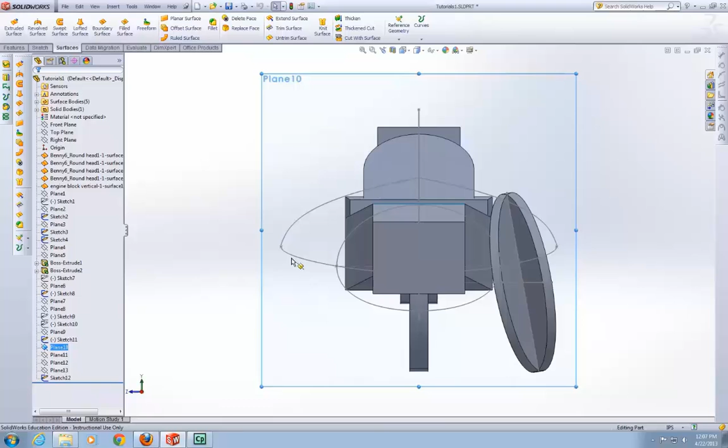Now, we've already completed the first set of guide curves on the front, and we'll now go to our next plane, which is intersecting the front wheel. Now, it's the same process pretty much the whole way. I'd like to create a guideline that intersects both the vertical splines and the horizontal splines. That way I can see the general distance and it's easier to connect my guide curves to them.

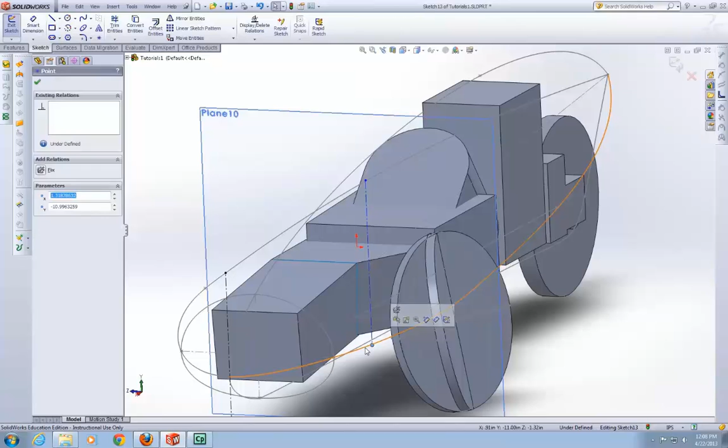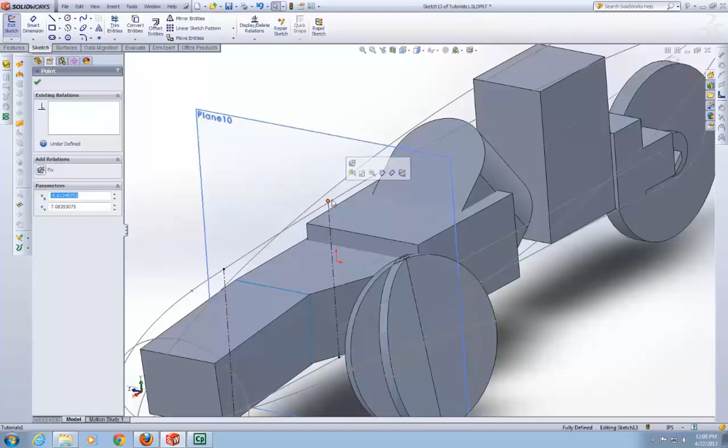Now it's just a matter of kind of fidgeting with the references of this line and making sure they're pierced to both the bottom one and the top. And I missed. I accidentally hit the right spline, so I have to delete that reference and try and pierce to the right one. There we go. And I think I messed it up again. Yep. I'm actually hitting the wrong curve. There you go. That's what happens.

Now again, it's just kind of fidgeting with it until you get the curves to do the right things, and as you can see, it's messed up again. What the heck is that? So I'll delete the reference, pull it, or pierce to the right spline, and there we go. There's a vertical guideline.

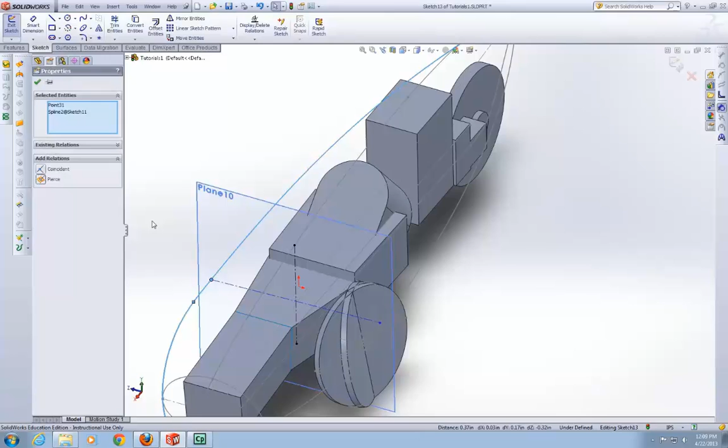Now we'll make a guideline for the horizontal section, piercing those two splines. Again, piercing is of utmost importance because if they are not pierced, then your curves will not work correctly when you are trying to loft. So you have to make sure all your points that are supposed to be connecting to different splines are adequately pierced.

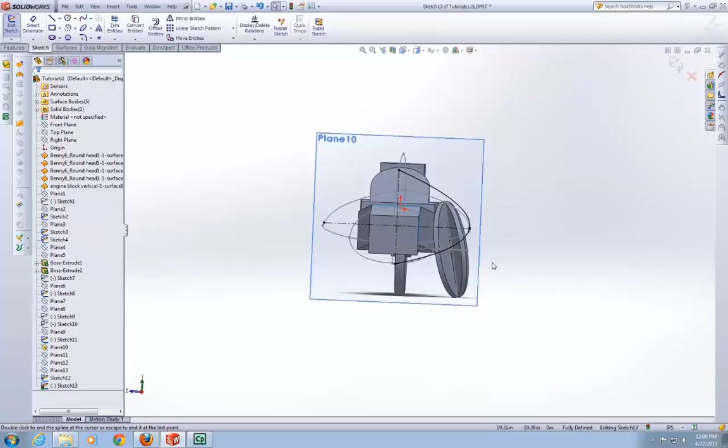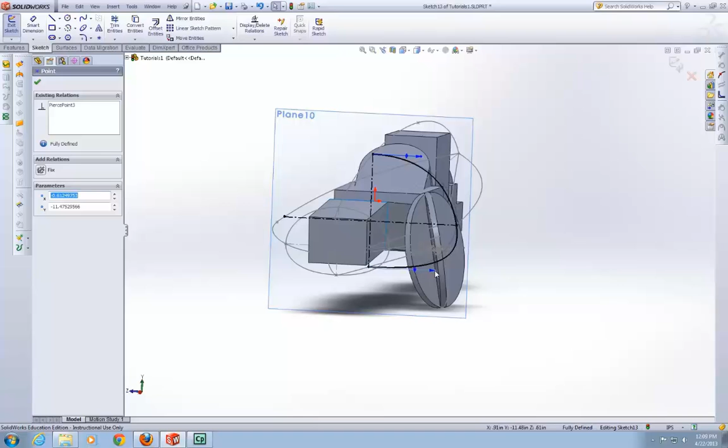Now as you can see, we have kind of a funky egg shape going on, so we're going to adjust that curvature. Go in here and manually put it to 0 degrees so you get exactly flat on the top. Now we're going to do the same at the bottom. I'm going to pull that out because we like a flatter bottom to help protect against vortex shedding. It also helps go around the wheel a bit.

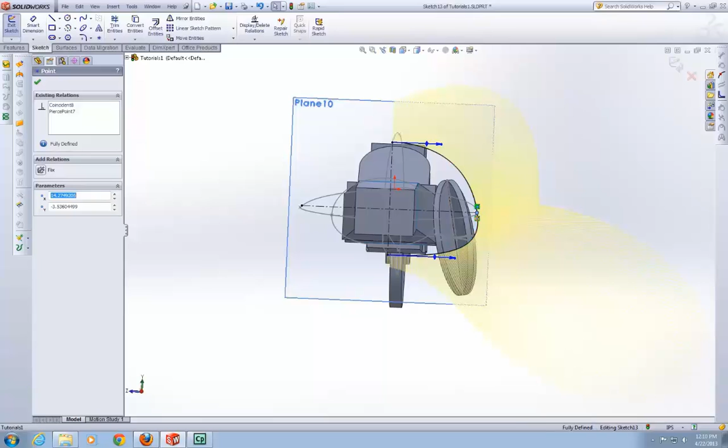Now don't worry about the bottom of the wheel. We'll make wheel fairings separately as a separate sketch later on in the design process. So your splines will go straight through the wheels. Don't worry about it. So now I'm just kind of looking at that curvature, seeing if I like it. Got a little bit of area there I could probably pull away. I think it's a little too excess.

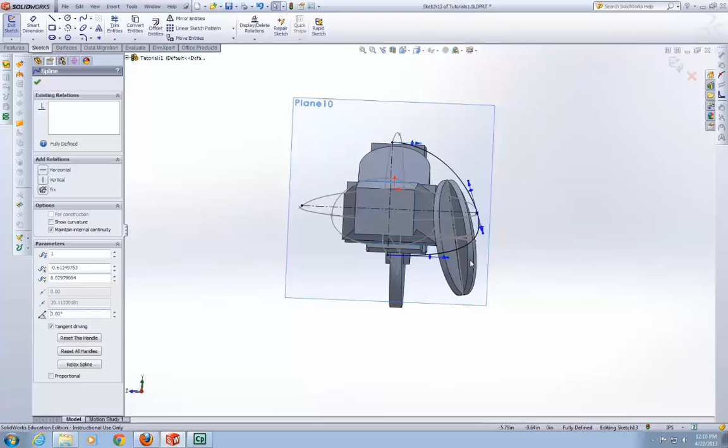So we're going to pull that in, just because we don't like extra cross-sectional area; it increases pressure drag. So the more cross-sectional area you can do without, the better. Now you could say there's more in there, but you got to be careful. You want a little extra room for when you actually close the loft. It's difficult to get around the front of the tire.

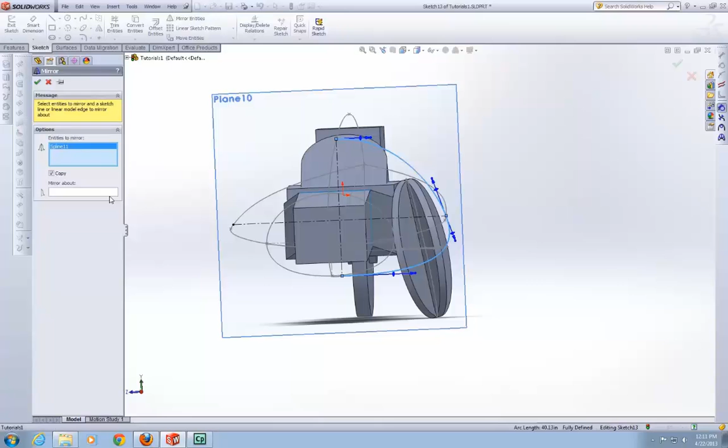And it's generally better to be a little more conservative in your approach than having a car that will come out too small for them to actually use. So now we'll mirror this half around the vertical guideline, and we've got exact curvature on either side. Make sure everything's pierced. It probably already is, but I like to go back and do it again.

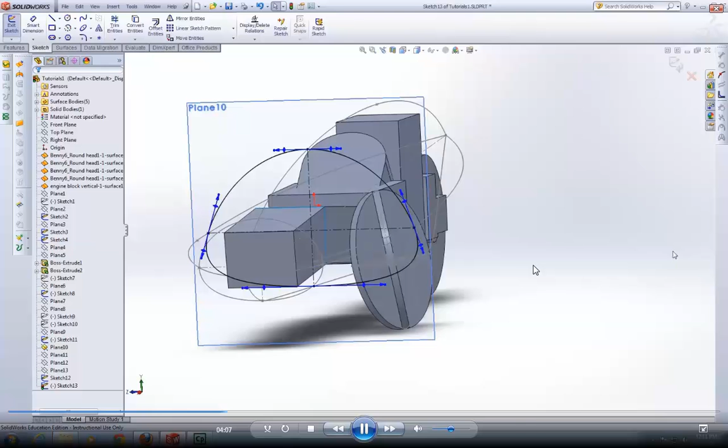Just because if you mess up one stinking pierce point, it can mess up the whole loft, and you'll have to go back and troubleshoot why your loft is not completing. So there we go, that's our next cross section. We'll now hide that plane so it doesn't get in the way, and show the plane that is intersecting our engine,

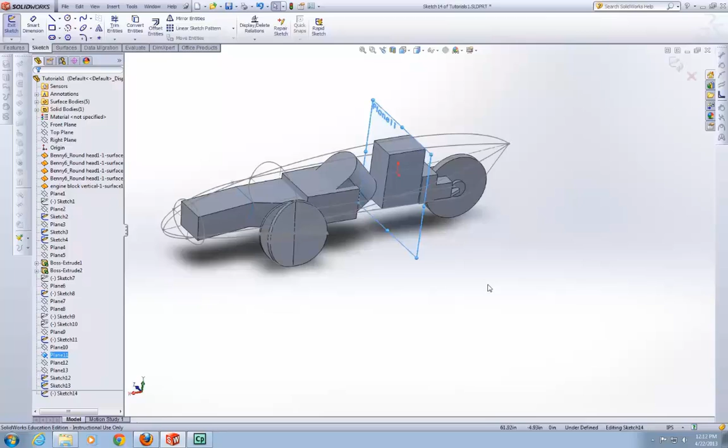which is the highest point on this car, so it is one of the areas where we need to define a cross section. So again, we'll start out with our guidelines. Now luckily this plane was defined on that point on the guide curve, so we'll just intersect it right there.

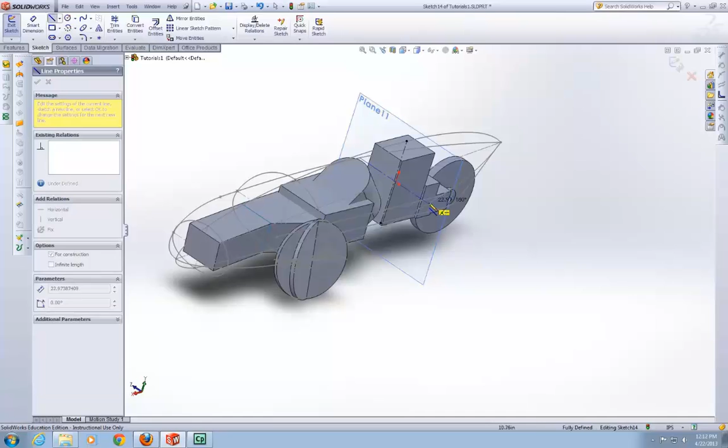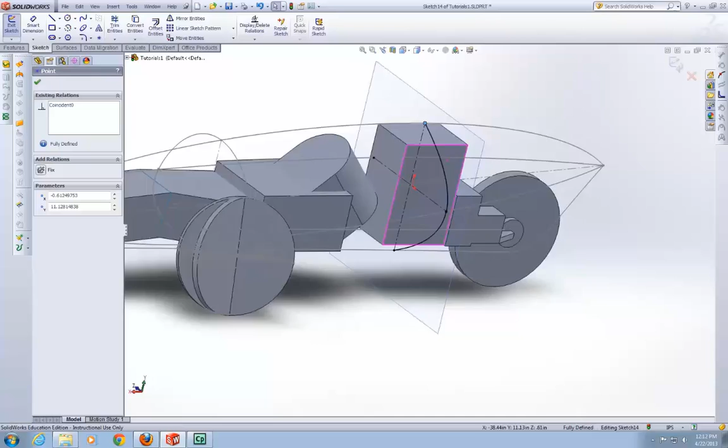Again, just piercing the points, making sure they all work, getting rid of other references that conflict. And there we go. That's the size of the cross section for this one. So again, we'll start with half and adjust the curvature appropriately and then mirror. So we'll start off. I like looking in the back or just offsetting it so I can see it better.

And we will hide some of the other sketches, or we actually can't do that while we're in the sketch, so we'll just forget about it. Now we're manually adjusting this to 0 degrees, so it's perfectly flat on the top, and we have smooth curvature connection between the two halves. Doing the same on the bottom.

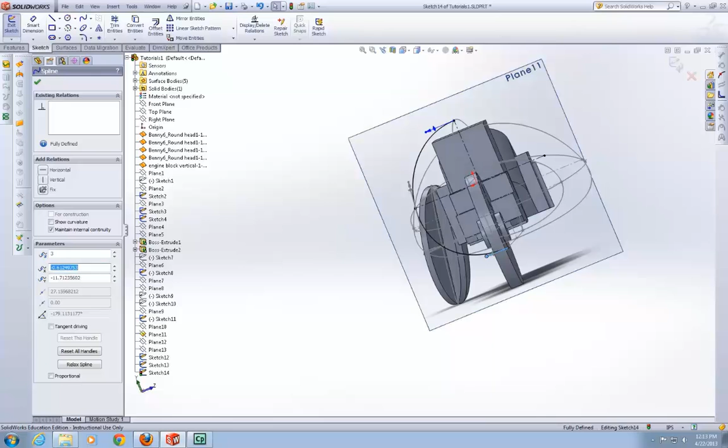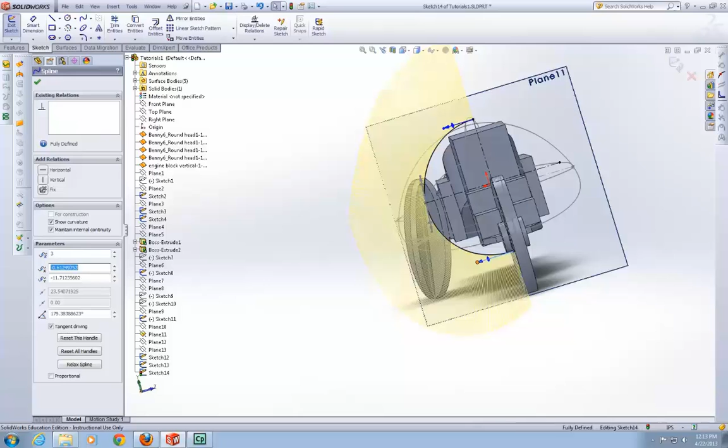Now because we're a little closer to the back, we'll start bringing this to more of an oval shape and less flat on the bottom. We'll still have some flatness on the bottom to reduce vortex shedding, but we need to bring it back to a smooth point or line in the back section. So we kind of want it a more round shape as we near the end. That looks good to me.

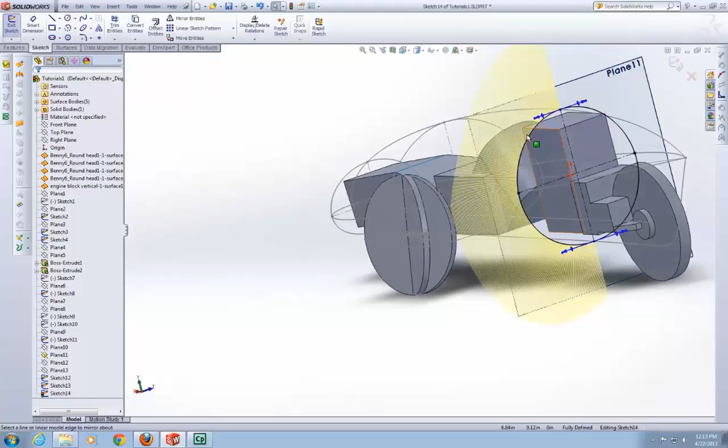So we'll mirror that. And it fits around all of our constraints, which is good. Just hide that curvature. Don't need it anymore. Make sure everything's pierced.

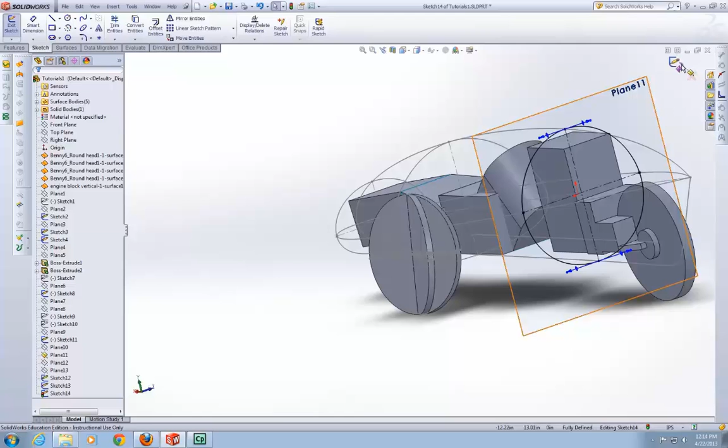Now, I may have said this in another tutorial, I don't remember. It is better to minimize the number of guide curves you will have. So each one of these cross sections I'm defining is a guide curve you use in the loft. The more you have of them, the less smooth your body will result in, because it has to conform to each one of those guide curves. So it's able to make a smoother transition with less, as we've seen in the spline, where if you have less points, it's a smoother curve than with more points. That's the same here. You want less guide curves.

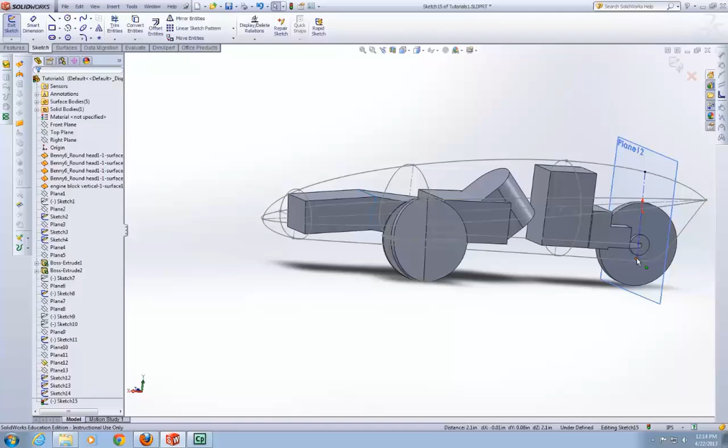So you only want to put them around the most important areas of the car where you actually need to define them. So now we're doing the rear end. We just want to make sure we have a cross section in this back area, so we can help make the car wide enough for a rear wheel fairing, and so that the body, when you loft it, doesn't loft through the rear tire. And now we're just going to delete some references that are conflicting. There we go.

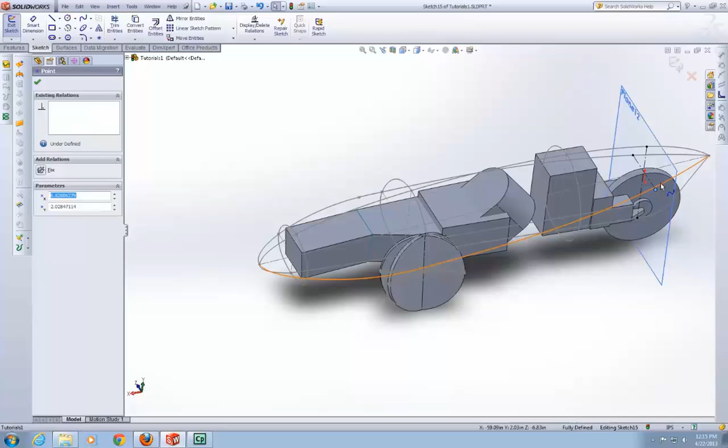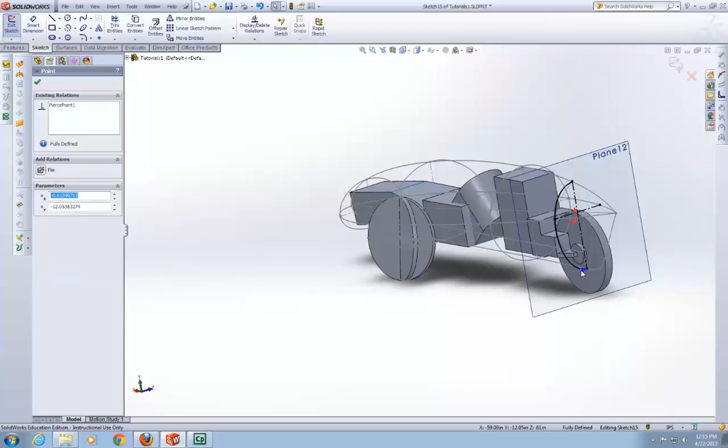Okay, we'll do half again, just adjusting the curvature. And as I said before, the bottom doesn't have to be as flat anymore because we're coming to the rear end. So at this point, we don't need it as flat on the bottom, and we just want the curvature to smoothly transition to the point or line in the back end. Now we want it still to have that exact flatness on the bottom, just so it's a smooth transition from the two mirrored sections, so you don't get some weird ridge on the bottom of your car.

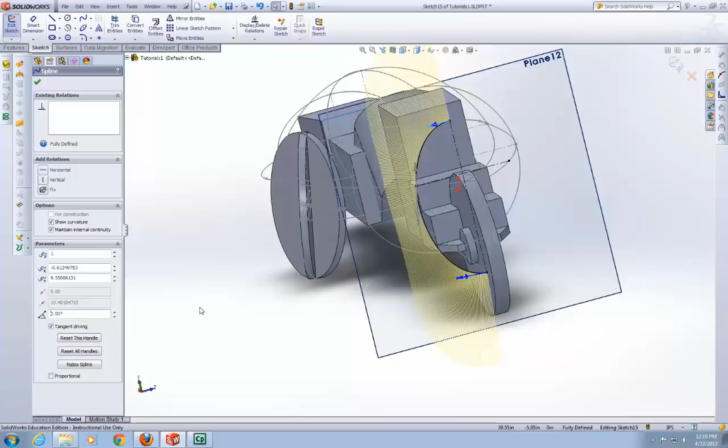Same thing with the top. You still want it to be exactly 0 degrees, but it doesn't have to be as flat. It just has to get around that wheel. So now we'll mirror that. Looks pretty good to me. And again, make sure all your points are pierced.

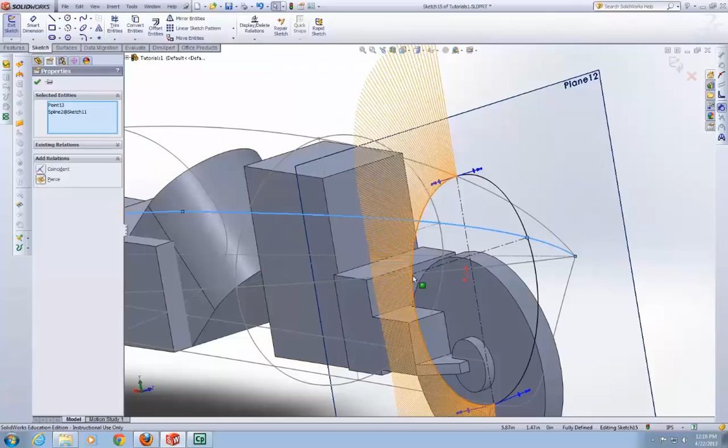And I sure hope this audio is recording correctly, because I'd hate to go back and do this again. I haven't really tested it that much this time.

So we're just making sure they're pierced. They look all complete. Now we will begin our lofting procedure. First we're going to hide this curvature because we don't need it. Hide the plane. We don't need to see that anymore. We've got our overall body shape.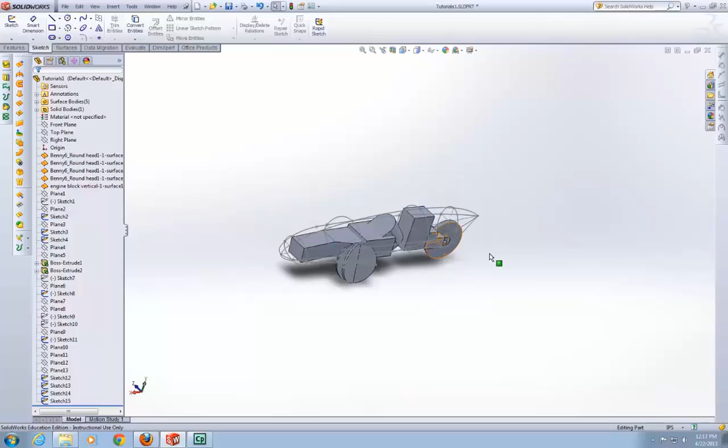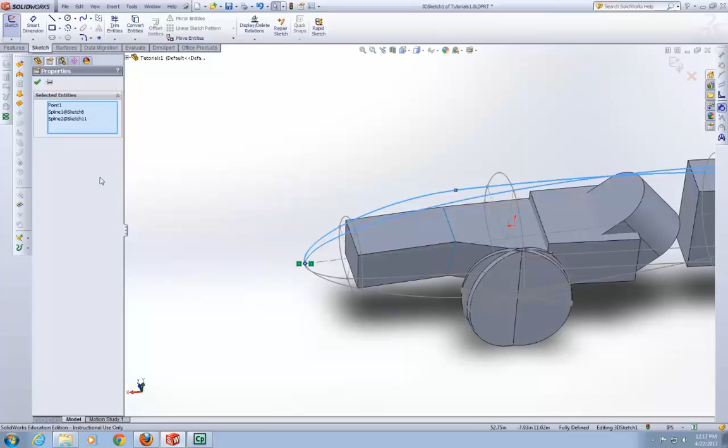So to begin, we will put a 3D sketch. Click under the sketch, 3D sketch, and then you'll want to make a point right on the front, right where your four curves meet, and then make sure it's there. Coincident, you want to make sure it is piercing or coincident with all of your curves, just to make sure.

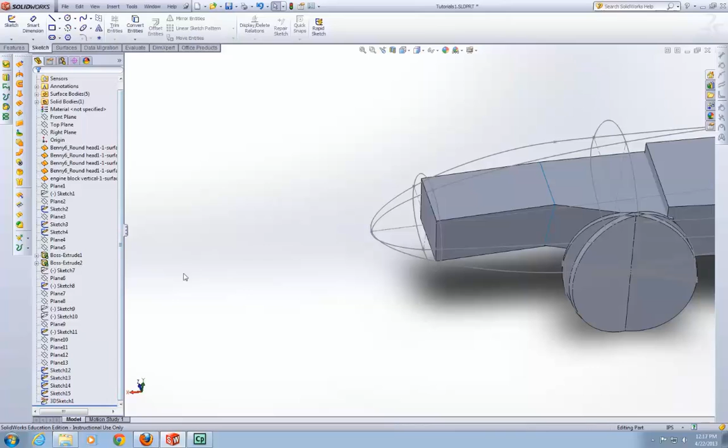It probably already is, but it's just good to have it as reference that way, because again, SolidWorks is a little finicky sometimes whether a point is actually part of the curve or not. So now we exit the sketch, then click on the sketch window. So now you can start a new 3D sketch. See how it says 3D sketch 1, 3D sketch 2. You want them to be separate sketches.

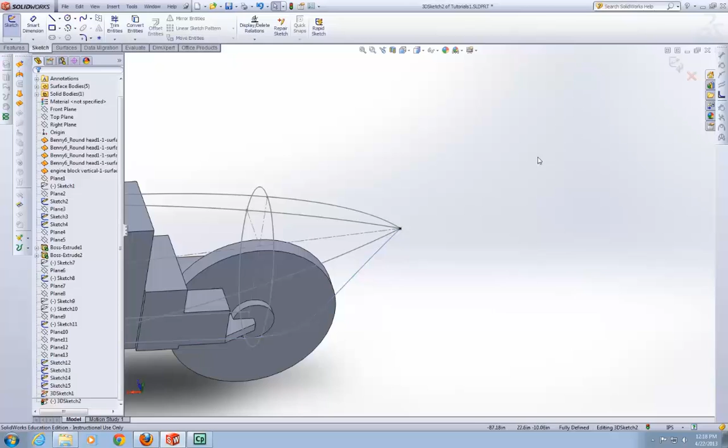So now you create a point in the back end. Again, a separate sketch from the first sketch. And make sure they're coincident with all the splines connecting to the back. Now, there has been some research we've done this year as to whether a point or a line in the back of the car is better. You'll have to do more research. We weren't able to get really good CFD parameter studies in regards to that aspect. My hunch is, as long as you maintain smooth curvature, either one will be beneficial.

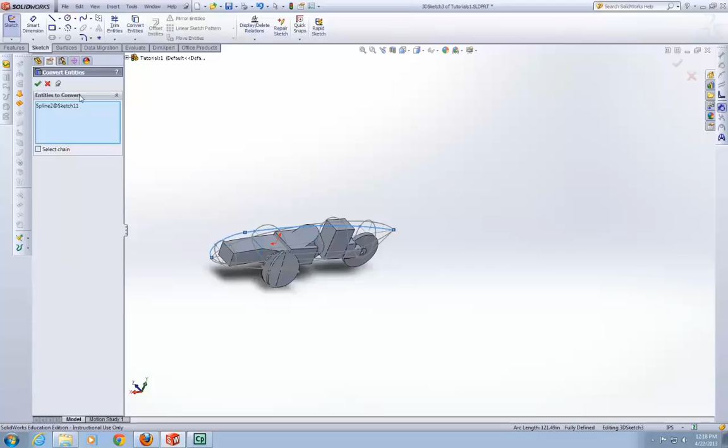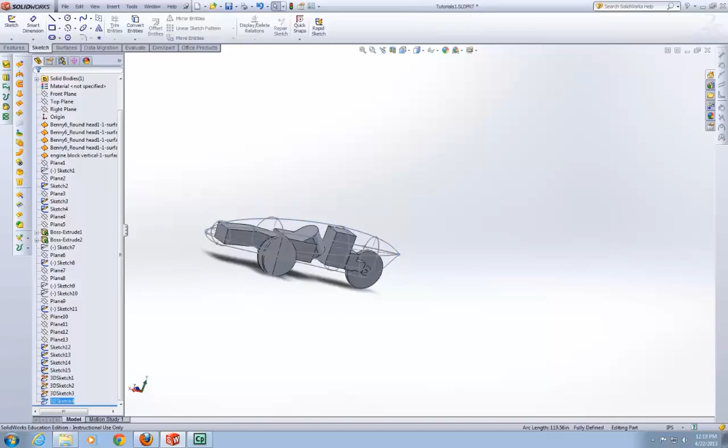But now, okay, we're going to convert our entities, so we're going to start a new 3D sketch. Click one of our horizontal guidelines, hit convert, and hit OK. Now we are going to start a new 3D sketch. So now we're on our fourth 3D sketch. Convert entities. We're going to do the top guideline. Hit OK. Exit sketch. Make sure we start a new sketch. So we're on 3D sketch 5. Convert entities. Do the right guide curve.

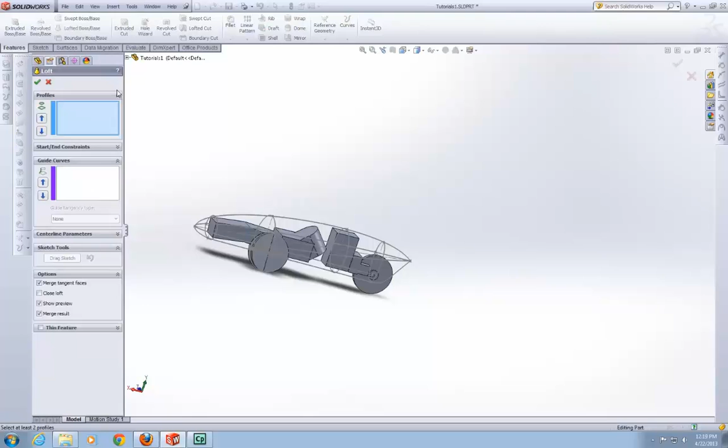There we go. Now we're doing this. We're going to do it for the bottom as well. We're doing this so when we do a loft, we can select each curve individually, as opposed to the original, which had a sketch of the top and bottom curve and a sketch for the left and right curve. So now we're going to go to loft. We're going to start with our profile with the front point. So we go down to 3D sketch 1. Then we're going to select the sketch that defines that front guideline.

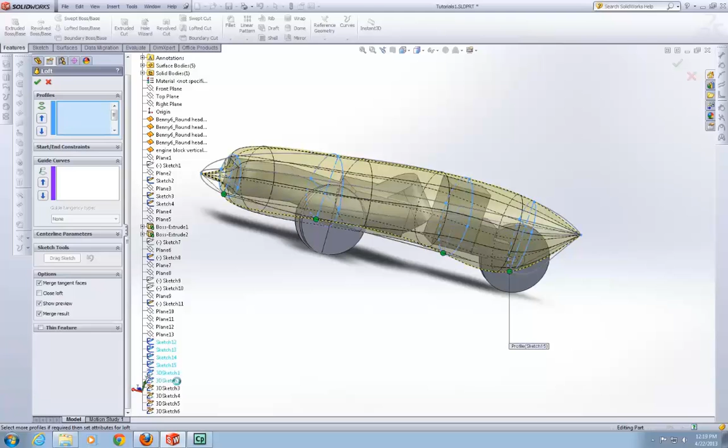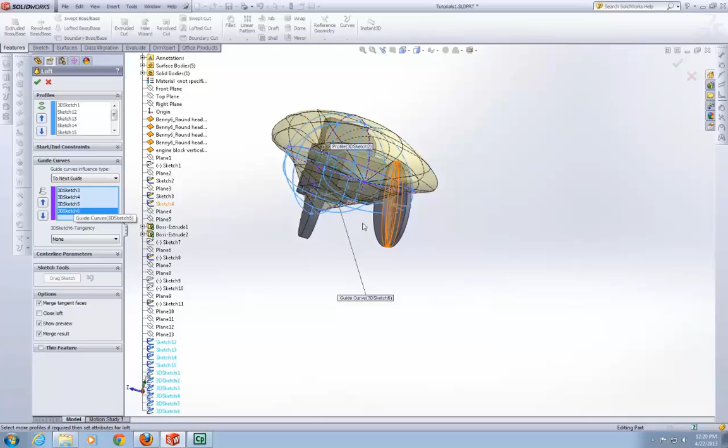Then the next profile. You have to do these in order. Then the next, and it looks kind of funky right now, but it will work itself out. And then you get to the back. So it still looks funky, but that's what guide curves are for. So we're going to just select all of them in a counterclockwise manner. Just want to make sure it does it in order. And as you can see, this is a problem we have commonly when we loft. It looks like it's working. It goes through all the 4 guide curves, but it just kind of jumps off the profiles themselves.

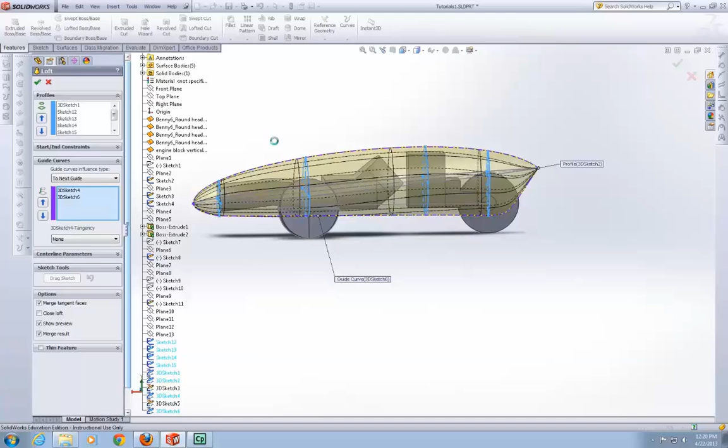So you have to delete a couple and just kind of see which combination of guide curves will get you the correct shape. So I deleted my left and right one, and as you can see, it's still maintaining that left and right guide curve, but it is now completely enclosed on all the guide curves and profiles. So we'll call that done. And you have your complete body. It encloses the wheels, for the most part. You have to put a fairing on later for each wheel.

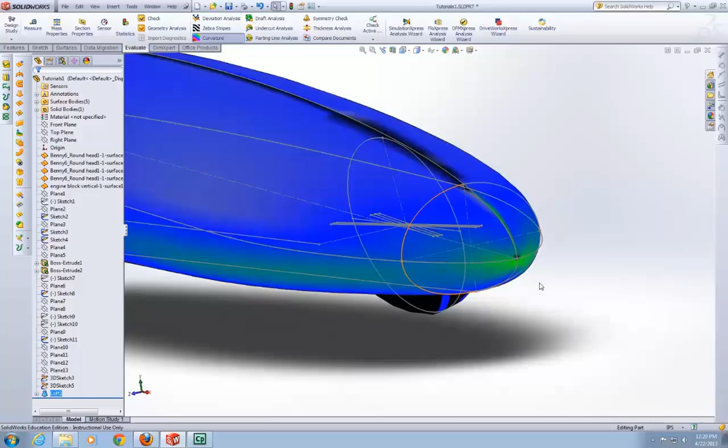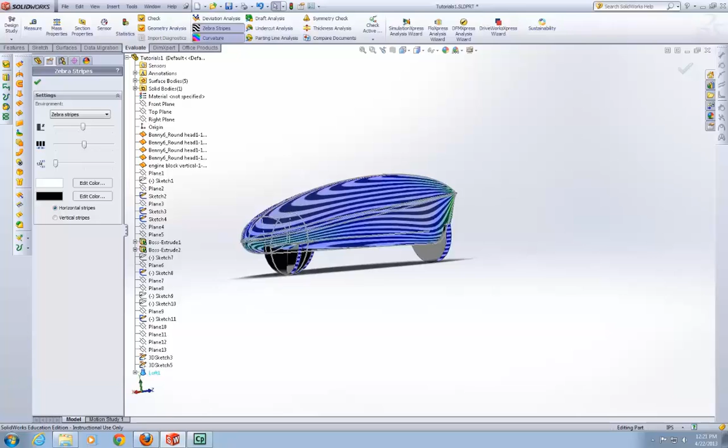Now we're checking the curvature. Look at that. Nice smooth curvature transition. We got a bit of a flat area on the top. We might want to look at that later, but it should be okay. The bottom is nice and flat. That's good. And we got sharp curvature in the front. That's just normal. Sharp curvature in the back. That's normal as well. But overall, it looks pretty smooth, which is good. Now we're going to add some zebra stripes just for cool effects. You can see it's almost like a good visualization of streamlines in a way. It's not perfect, but I like to think of it that way, if they were perfectly attached.